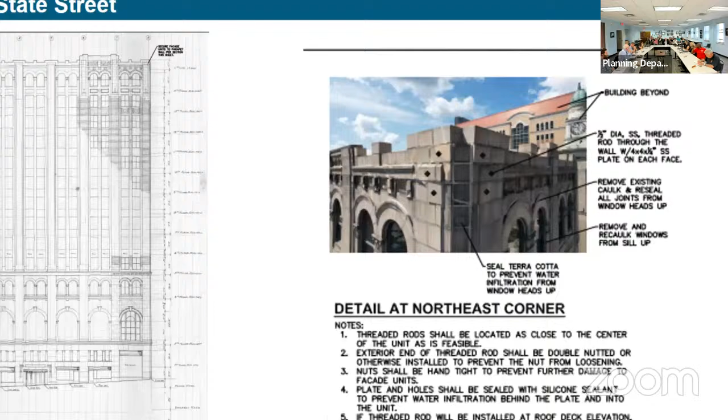So all you would see from the street level are these tiny 4-inch plates, put on in a diamond pattern. What's happening—is stone separating? No, the whole parapet was taking on water prior to us getting involved, so we've stabilized it, waterproofed the backside, but just belt and suspenders, we're going to anchor it back to the building behind the scenes, and add these little plates from the front.

Now that the water has been stopped, it should be there for another 100 years. So it's a stone veneer? It's actually terracotta block, and behind it is a brick veneer—these are all terracotta blocks. Part of this work is...

And there are no roof penetrations—these are kind of dead man sleds that are ballasted sleds. Exactly right. Yep. Did you investigate any other type of anchors? All kinds.

Believe me, we just put a brand new roof on the building, and this was the preferred method. We don't want to start drilling into the building again, so it's a weight system with ballast, and also we stopped the water infiltration. So that's the good news. During this phase, we'll be re-caulking and repointing everything from those window heads up, and then sealing the terracotta that's lost its protective skin with a clear coating that keeps the water out.

Suggestion: Prosoco makes what they call a stitch tie, and it's helical—almost looks like a drill bit. You drill a hole through the veneer and the backup masonry, insert this anchor, and it holds it together. You can do it through the masonry joints, and it's a way of re-anchoring. It's something you probably won't see, because you just fill in the mortar joint hole. It's like 3/16 of an inch.

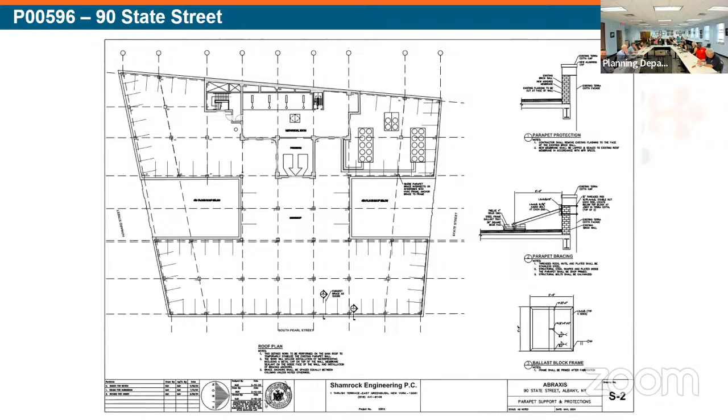So these we don't have this? No, I just brought that with me tonight because I thought it might explain it better. The markings you have—are those the tiny little plates you're adding? Yes, and they're threaded stainless steel. These are all stainless as well? Yeah, they'd be stainless, but I'm willing to get them coated to match that turquoise color, or we can match the terracotta. The turquoise is right there—see that right here on the building? We have that element, we'd match that color.

But these are new elements? Those are new elements, right? You could also match the terracotta color instead, which would avoid introducing a new element. Correct, absolutely—I'm happy to go either way you guys would like.

Who's running the show over there? Would you like the blow-up detail of detail 2 on S2, please? That one, yeah, if you could blow that up. This one? Perfect.

And the plates are 4-inch square? 4-inch square, yeah—you'll barely see it from the street. Yeah, this building is 15 stories.

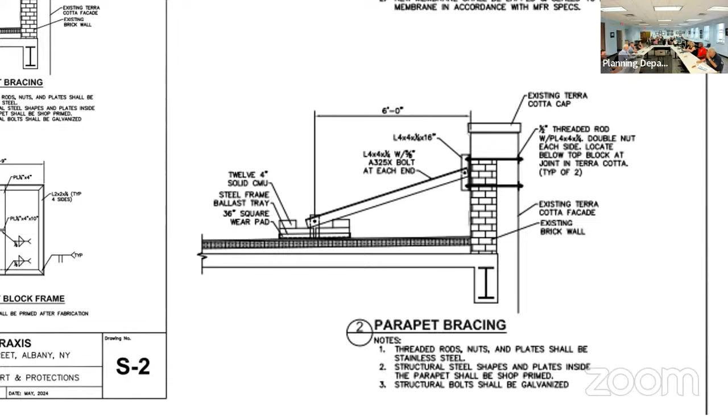Erin, do you have a copy of that photo you put on the screen? The only thing that I have in the PowerPoint is... It's a little teeny photo, it's hard to make it out there. That is what was in the initial submission.

Also, Jess, because I did find it, the Dowsil contractor sealant guide that is part of the original permit they had submitted last year. It does involve stating that Dow does do a cured sealant sample for accurate color matching to ensure that it won't break the color.

Did we see that? That material's not in our packet. Yeah, it should be. That's actually, I misspoke. The Dow is the caulk. Caulk is color matched. The sealer was not.

Okay, now I'm confused. So was what you just described, that wasn't in, did I miss it? Is that in our packet? No, because that's from an old permit that this was involved with from 2023. Okay, should we be discussing then the questions that I'm asking right now, or was it already approved or handled? No, it wasn't. It was under a non-closed permit. Okay, so this is an appropriate discussion?

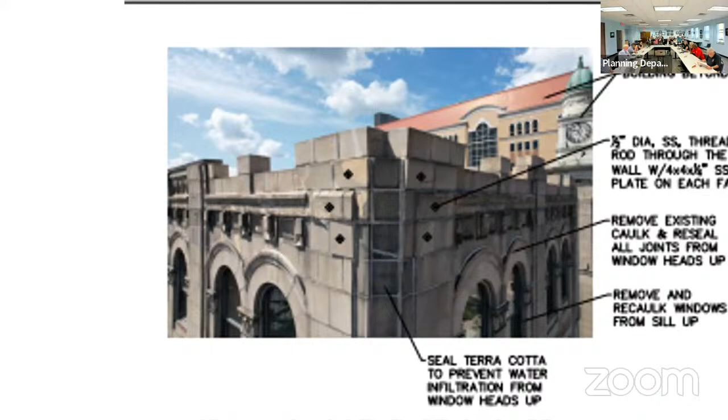Are the joints half inch or three-quarter? Yeah, they're three-quarter. No, I don't think he's going through stone either. We have the option with the spacing, we could probably do either. I would rather go through the joints than the stone.

Yeah, I would agree. What did you say about the joints? What did I hear, three-quarter? No, like a couple minutes ago. Oh, why did I think you said that?

Well, they have a sealant they're using to seal the joints, because there's probably mortar and caulk loss in there. There is caulking to be done around windows and where there's visible cracks, so that sealant would be color matched to the terracotta. That was the one he brought up before, that was submitted previously — the Soko product.

An anchor called stitch tie, going in through the joints.

Has anyone been up close on the facade to see the terracotta and all the joints, and what's the condition of all the joints? Are you planning to 100% repoint, recaulk, or both from the window heads up? Everything below that seems fine. And is it mortar now or is it caulking? It's both — the building's been repaired over the last 100 years by both.

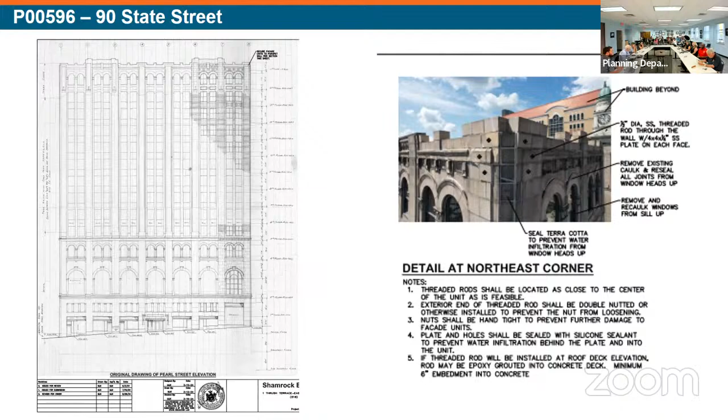The next item on the agenda is 469 South Pearl Street in the South End Groesbeckville Historic District. There are a number of rehabilitation measures being proposed for this building. Is there someone to speak on that front?

Good evening. Good evening, how are you doing today? Good. If you could introduce yourself...

Sure, I'll start. My name is Sam Simmons, I'm an owner of Simmons Design and Development. I'm working in conjunction with architect Keith Cramer to provide a design for the rehabilitation of this historic property owned by my good friend here, Mr. Stefano Marracino. Nice to meet you all.

It's a nice building, man. Very nice building. Yes, very nice building, definitely needs some work, but that's what we're here for.

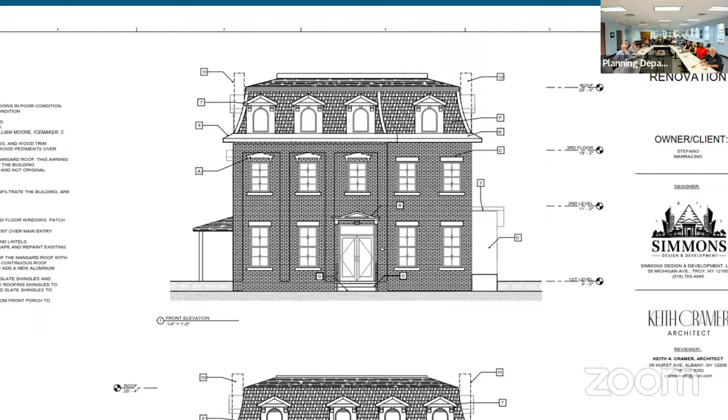In the back, we're not doing much besides, as you can see, right under the mansard roof windows, there's a roof awning that sticks out. Currently those are boxed-in gutters, the original boxed-in gutters. Those have been failing for years and caused heavy brick deterioration below. So our plan is to essentially infill that boxed-in gutter and make it a roof awning.

We'll finish it with metal flashing, and then install an aluminum gutter along the outside. It'll still keep with the traditional historic look. I don't think most people will notice it from the ground, but these boxed-in gutters are a heavy source of water infiltration. That's probably the bulk of this work, basically tightening up the envelope of the building, which has seen heavy deterioration over the years.

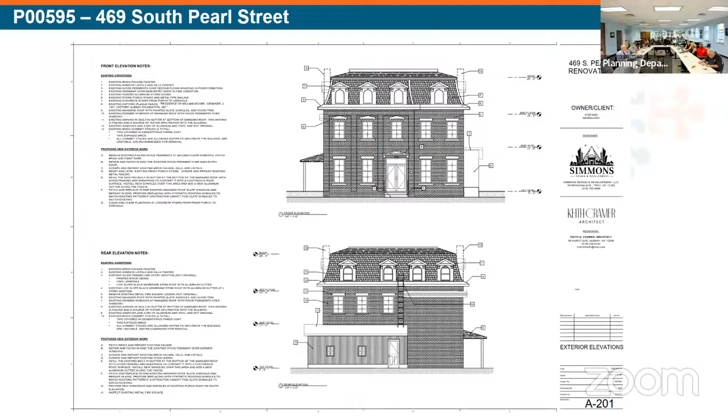In the back of the building, there's not really much we're doing besides the boxed-in gutters. As you'll see, right there, the mansard roof windows, you'll see that roof awning. As I said, all that is planned to be infilled, so it'll no longer be a boxed-in gutter, it'll be an awning roof with an aluminum gutter.

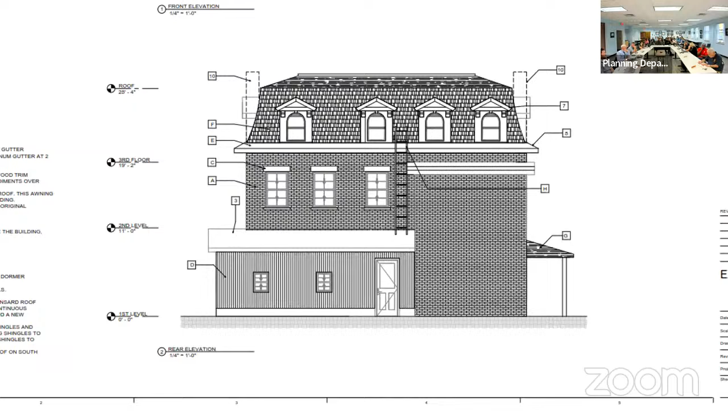To the bottom right, you'll see a small roof overhang, which is an entry door on the south side of the building. Currently the actual roof structure is missing, it's basically just the structure there. We're looking to infill that roof with a small shingle roof. If you want to go to the next page. Well, do you guys have any questions so far?

And everything is being repainted? All the brick is being repainted? Yes, repointed and repainted for the most part.

The top elevation would be the north elevation. Those wood pediments over the windows, as you can see, once again, they're badly deteriorated. I have more pictures on the last page of this set, but just going over the scope.

These are a big item we're looking at, hopefully you guys can approve this - there's 4 chimney stacks on the north and south elevations. Right now they're mostly covered in cement, a cementitious coating. Those chimneys are failing badly, allowing a lot of water into the building, adding to the problem we have with the existing gutters. So what we're proposing is to demolish all 4 of those chimneys. We'll infill to match the existing roof, and with the roof trim along the top, we'll infill that with a wooden roof trim. Essentially it'll just go away. This will be very costly if we have to rebuild it, and right now it's not structurally sound, so the best thing is to remove it.

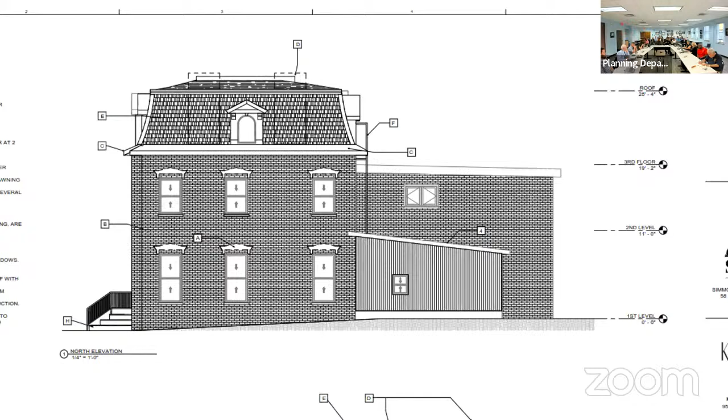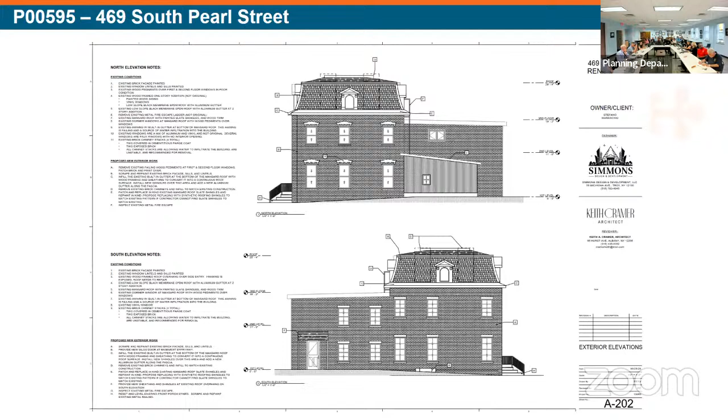Presumably they're non-functional chimneys? Non-functional, correct, but they're original to the building from what we could find. It was hard to find information on this building. I was hoping you guys would have more information for us, but I didn't find too much - any old pictures or anything we could look at to say what was original, what was maybe added years afterwards.

This is the south elevation. As you can see, that's the southerly entry door, which we'll put a new roof on. And if you look up at the top, you'll see the outlines of where the existing chimneys are now that will be demolished. So essentially, as far as you guys are concerned for the exterior, that's the scope of the work we're planning to do.

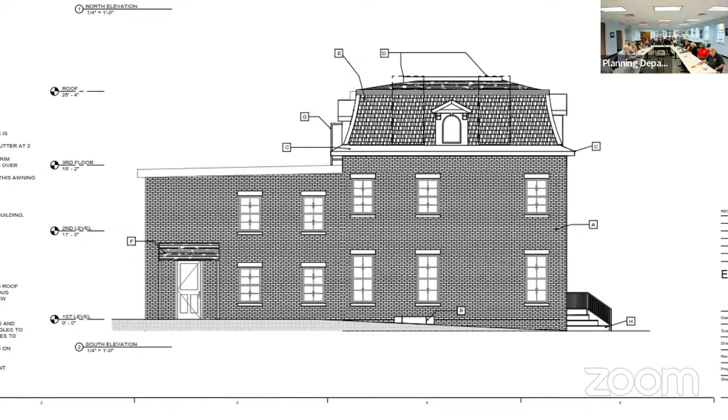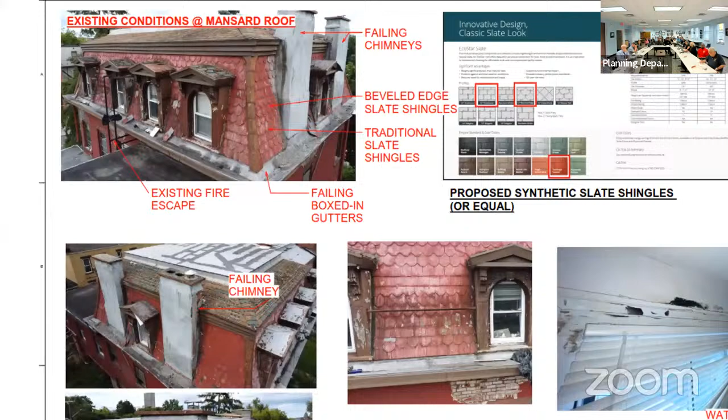Yep, those are some actual pictures if you want to zoom in. We're proposing to go back with some synthetic slate shingles. I have a couple specified up there. We'll make sure they match as closely as possible.

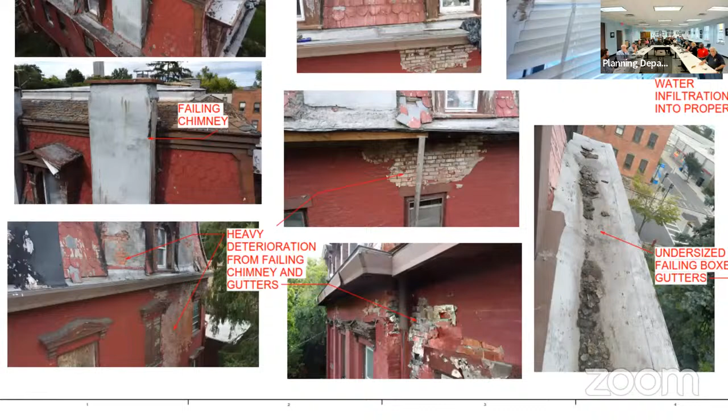So those slates were all painted over? Yes, they've been painted over for years, yeah.

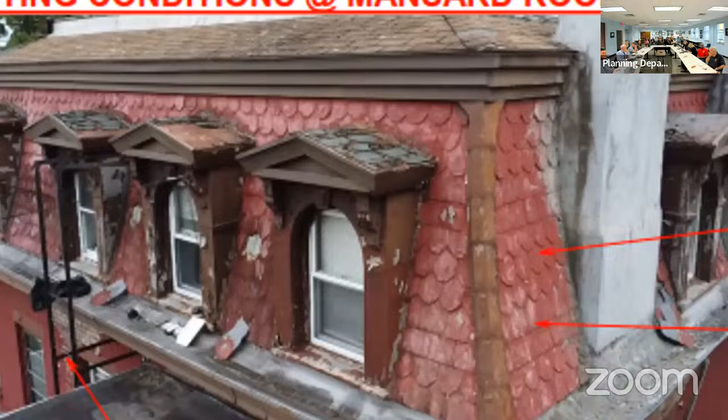Are you using any of the state and federal tax credits for the project? No, we're not. At this point, it's all being funded by a good friend over here, and that's something he's definitely looking into, to see what grants are available. If you guys could suggest anything, that would be great. We provided him some info for the state and federal credits to help get that process started.

So most of your original windows are 2 over 2? Yes, 2 lights over 2 lights. Are you going to repair them or replace them? Right now there's a mix of vinyl windows, which clearly aren't original, and the wooden windows that are original, which we look to repair. Where we can, we'll make sure the vinyl windows are painted to match, making all the windows match essentially. So you mean the vinyl windows up in the mansard? Correct, and there's also vinyl windows in other areas of the building as well.

Some notes I have: if you do pursue the State Preservation Office, the 20% state and 20% federal tax credits are pretty substantial. Our comments here will focus on the exterior, and their purview goes from the exterior to the interior. But that's seriously something to look into, since credits can go backwards and forwards. So a couple of comments from the presentation.

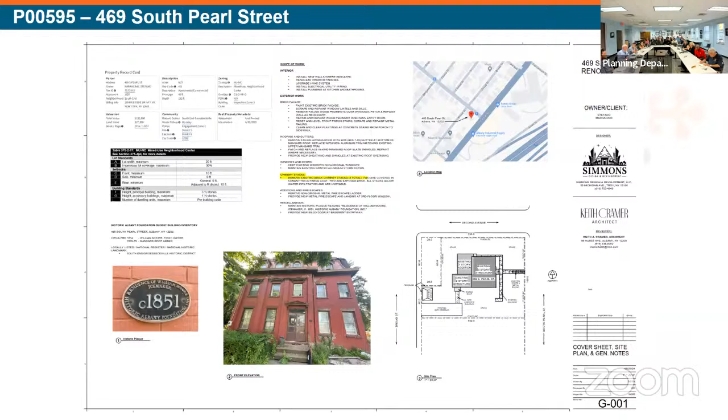The mansard roof is a very significant character-defining feature of the building, and the built-in gutters are troublesome—there's been some kind of flashing installed on them. Did you use the word awning about the gutters? I'm calling it an awning roof, essentially just a small skirt roof. So instead of it being a gutter, it would be infilled with wood, and then an aluminum gutter added along the outside to catch the shedding water.

We would really look for what's the profile of the existing element that's visible—not necessarily the concave of the built-in gutter, but what's under that metal, what's the profile of that trim, and then how it would be altered by your infill and the hanging of the K-style gutter outside of that. So almost a comparison of what's original underneath that metal that's been added. And this isn't metal—that's some sort of modified bitumen, with bits of rubber as well.

So there's kind of four columns of photos. The bottom one, the second over. Yes, that's the module.

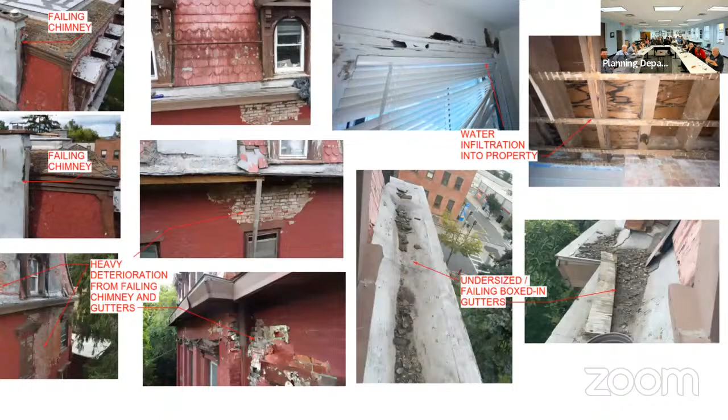So the point is, underneath that is an original profile, and what is that? That's my question. And how would that compare with what you're proposing? From what it looks like in the research on boxed-in gutters, it literally just looks like a concave profile. I don't think there's any decorative feature in there. I'm more interested for this conversation with the outer profile.

The actual fascia, you call that? Okay, that's exactly right. I didn't see any decorative features on that fascia as well. It just seems to be aluminum flashing wrapped around, and that's it. I wish I had better pictures to put in there. There's something there, I don't know what it is. I can't tell from the photos, but it would have had some sort of a profile.

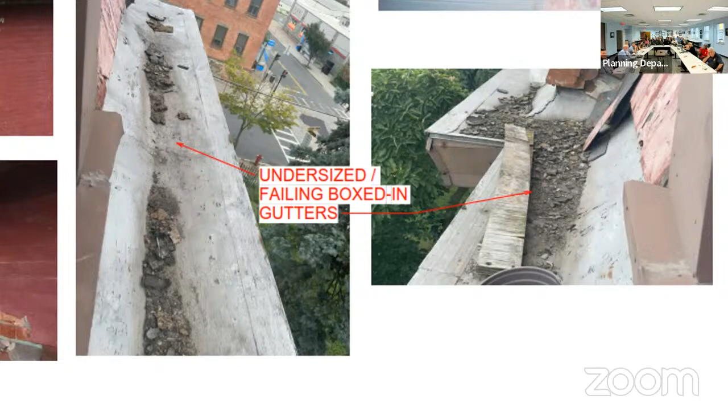Can you scroll up to the bottom left, let's zoom in. You see that, it's just not much of a profile, not real detail. I think it's been covered over. Yeah, that's brake metal that has been covered, or has covered over what the original profile was. So if you pull that off, that would reveal the profile, and then what steps you would take to attach a new gutter to that.

So is that a directive, is that something that? I'm putting it here for the commissioners to review. And then the last question I would ask is, the treatment of the windows is not very specific yet.

There's some vinyl and there's some wood 2/2, and which would be better—it would be good, I think, to know exactly which windows are having which treatment. Also, it's great to restore the windows, that's terrific, but will there be storm windows installed on those? Are you going to try to get double glazing in there? So a question like that, I think we might want to discuss.

So, I would say for your project proposal, you had mentioned you are leaving the windows out of this project proposal, right? You're doing windows in a future project? Yes, that would be the goal. Okay.

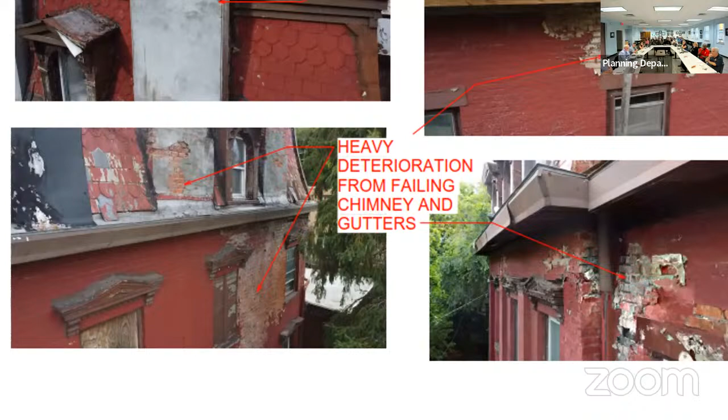The slate roof has a pattern. Yes. And would you put the same pattern back? Yes, the pattern is a mixture of beveled edge and traditional square, round edge, flat. It's not really round—it looks round, but if you zoom in, it's more of a bevel. But yes, the goal is that, and that's what we specified if you actually zoom up.

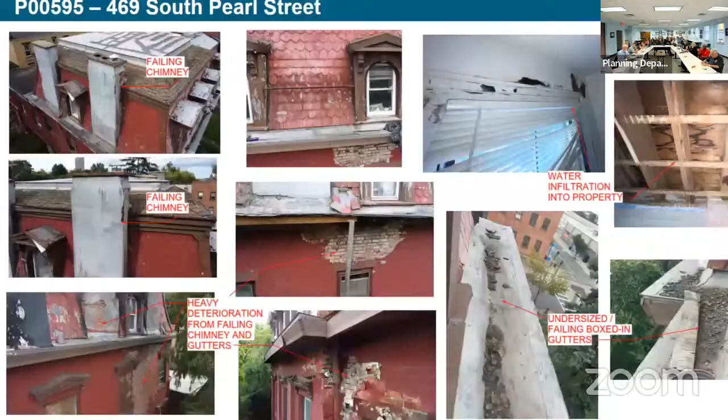So I didn't see it—so you see here that they're replacing it with a patterned asphalt shingle? No, I didn't say pattern, but in the package is a synthetic slate. I saw the synthetic slate. That's all I know. Oh, okay, because I was thinking it would be like that flat, typical hard synthetic slate, like the rubber.

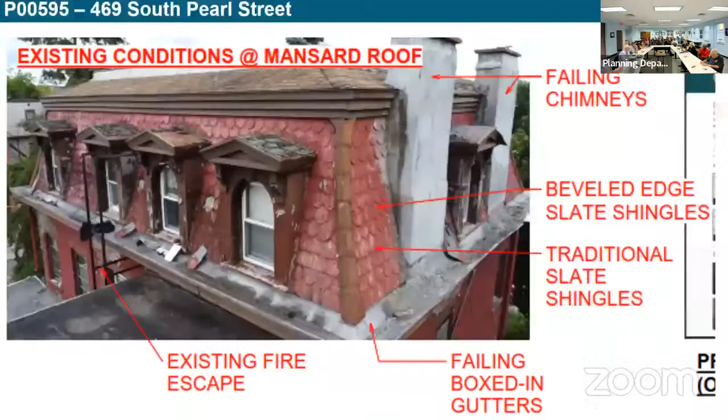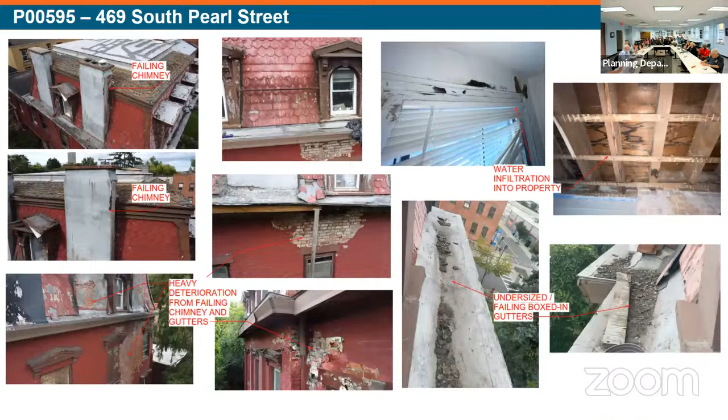If you actually scroll over to the right a little bit. If you move over to the right, it actually specifies the shingles. Yeah, it's in the packet. Yeah, that's what I was looking at, I just misheard—it's the EcoStar slate. To the right of where it says beveled edge slate shingles, if you could pan over to that section of the page.

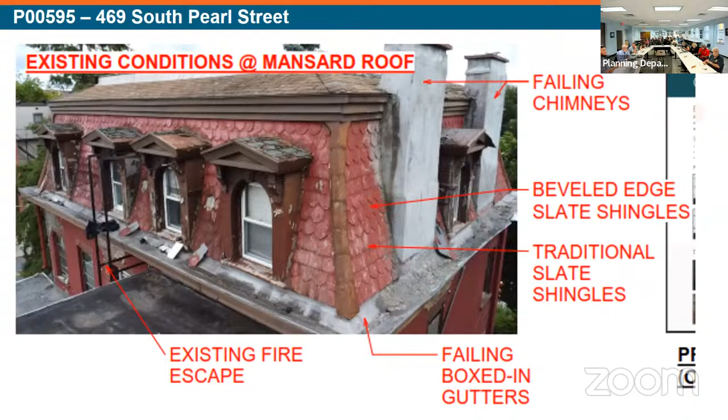Yeah, so this was part of why the email had mentioned you might have to have the packet. Yes, there you go, we can get it zoomed in. Some of these pictures just have issues. It's the EcoStar slate. Correct, yeah, I see that, and it does look like it's the pattern to match, and I see the color choice, which matches the painted slate.

The 1851 date, going with the historic Albany plaque, there had to have been a report on the history of the building in order to get that plaque. Have you seen that? I have not seen that. I don't know whether this one or the one next to it was Dr. Reisberger's home.

They're very prominent people. He was a physician, serviced people in that neighborhood, was very well known. And it was a family home for a long time, quite elegant. Right. And the one next door as well.

When I look at the one next door, it's more original. This one got gussied up in the Victorian era. And so the way it originally looked may have been less elegant when they got into the 90s. That's why I thought the pediments were maybe an addition.

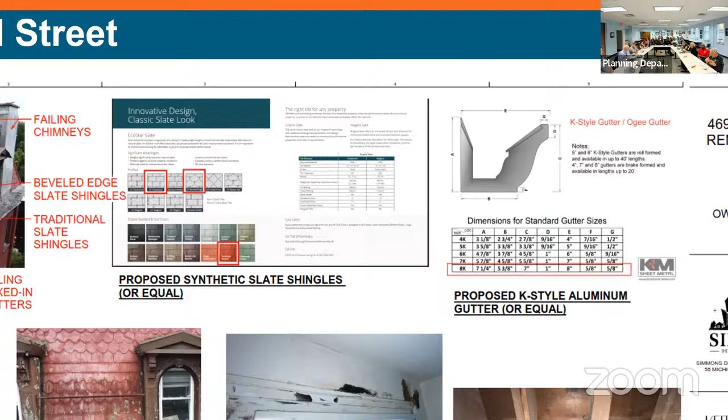When they got that oval plaque, a lot of things were put into it, I'm sure. Okay, I'll definitely reach out. Well, on the drawing, there's a Historic Albany Foundation oldest building inventory, 469 South Pearl Street. It says 1854, William Moore, first owner.

1870 to '75, the mansard roof was added. That seems more like it, I would say that the pediments came in over the windows when the mansard roof was added. You've got two different styles kind of conversing with each other on the building. I'd say the four chimneys were from day one though.

That would be my guess, but they wouldn't have been that tall — they would have been a little shorter. If the mansard was a whole story added to the building, then the chimneys would have gone up with it. And so that 1875 addition is also important, as Commissioner Catlin said, it's not just the 1851 roof.

What's your schedule for construction on the exterior? Well, we're going through the process of getting approved for the historic review for you guys, and then we have to submit this to the city for the actual building permit for all the interior work. So considering if you guys approve everything today, and then we can finalize the construction documents we have.

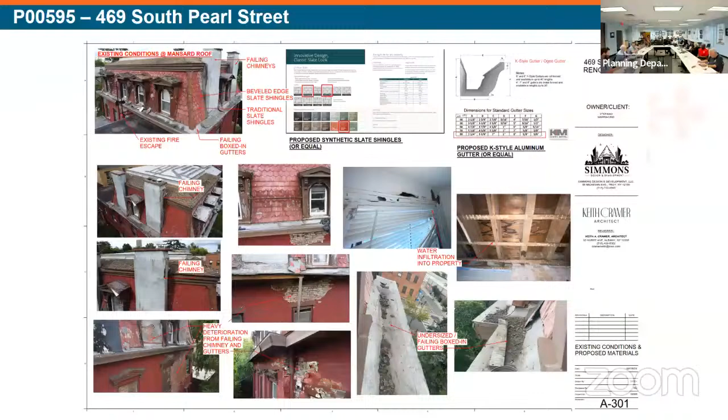Talk to Aaron or Christopher about scheduling a site visit. We will make ourselves available as quickly as possible. Understand the urgency of the project. We're happy to see the project go forward. Want to help you in any way we can.

So can we talk timeline? If you were to meet within the next week or two, gave us direction, we were able to update our plans, would we be back for the October meeting for approval, or do we have to come back for official approval? How does that work?

So we will send out a doodle, what we've done in the past, to the members. We can't have a quorum, so it'll only be 3 members at the site visit. We will schedule that, and then as long as we have the revised documents in time, we can place the item back on the agenda for a hearing in October.

Okay, if we have enough time to get you moving. That would be the goal. I'll communicate all those dates to you and everything, so you have them.

Great, thank you. One more comment. There's a really good source of technical information on the National Park Service website. You want to look at the preservation briefs. You don't have to read all of them, but the ones that are useful to you will be very, very useful, whether it's kind of mortar or other material or brownstone patching. So it's all from the National Park Service, the preservation briefs. It's good information.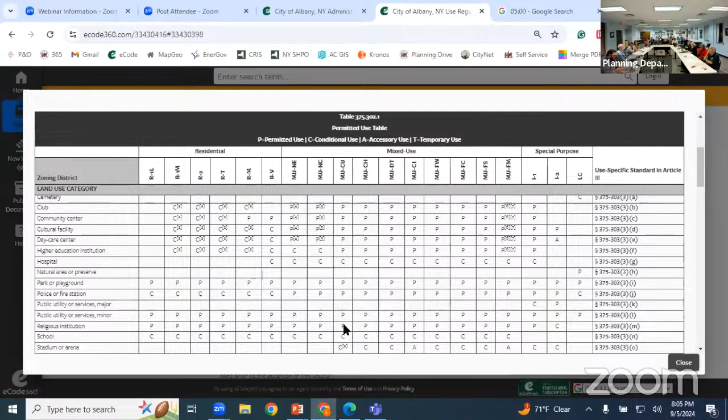A bar or tavern, a cannabis consumption site, which has other restrictions on it. It's already being used as a cannabis consumption site. A restaurant.

A bed and breakfast, a hotel, beauty salon, blood plasma center. Oh, I'm sorry, you cannot use blood plasma, wrong one, I apologize. Conditionally as a funeral home, laboratory research facility, medical clinic, office, personal business, professional office, trade school.

I mean, indoor recreation and entertainment. That's a very comprehensive list. Yes, thank you, it just goes on. That was what I was interested in. It is all available online in our permitted use tables.

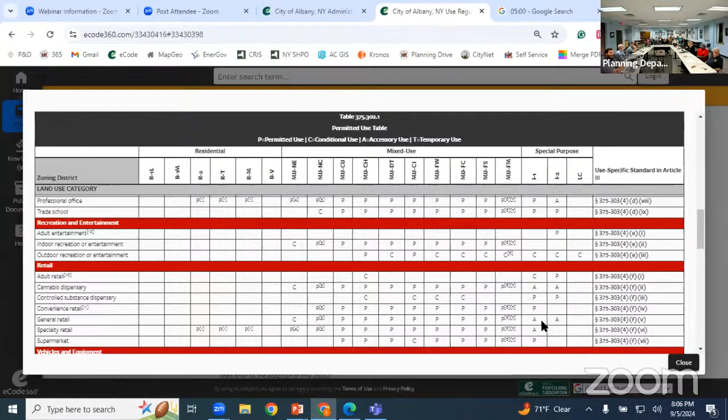I also just want to add real quick, it is no longer prior non-conforming use, that does not apply. Everything that was just listed is the only thing that does apply. It's vacant for more than a year and not maintained under the prior non-conforming use status. So the owner was correct in saying that that does not apply.

And I'd like to add, if you've ever seen the floor plan in Renaissance, part of their conclusion, the entrances are very narrow, the entrances to the bathrooms are very narrow. Renaissance concluded they would not be able to make these ADA compliant, and therefore not be able to rent them to college students.

Erin, I have a question. The SHPO letter says the eligibility determination is from 2011. That's a long... I mean, we've all been... so in the packet, yes, they did issue a determination of eligibility in 2011.

But as we stated in the packet, as of the 3rd, the State Historic Preservation Office has updated it to the determination of eligibility, building off of the 2011 determination. These structures are still considered eligible for listing on the state and national register.

And what's in my mind is we've all watched, they're very prominent buildings. They're a pretty substantial blemish, in my opinion, on the lack of a thorough, comprehensive, and proactive preservation aesthetic in the city of Albany. It's obviously complicated with private ownership, but 2011 is 13 years ago, and there's been a lot of attention to these buildings for quite a long time. I understand the challenges of rehabilitating them, I work on all kinds of buildings with different challenges to rehabilitation, so I understand those are there, I understand the code, I understand lots of pieces of it, but they've just stood out as such important buildings.